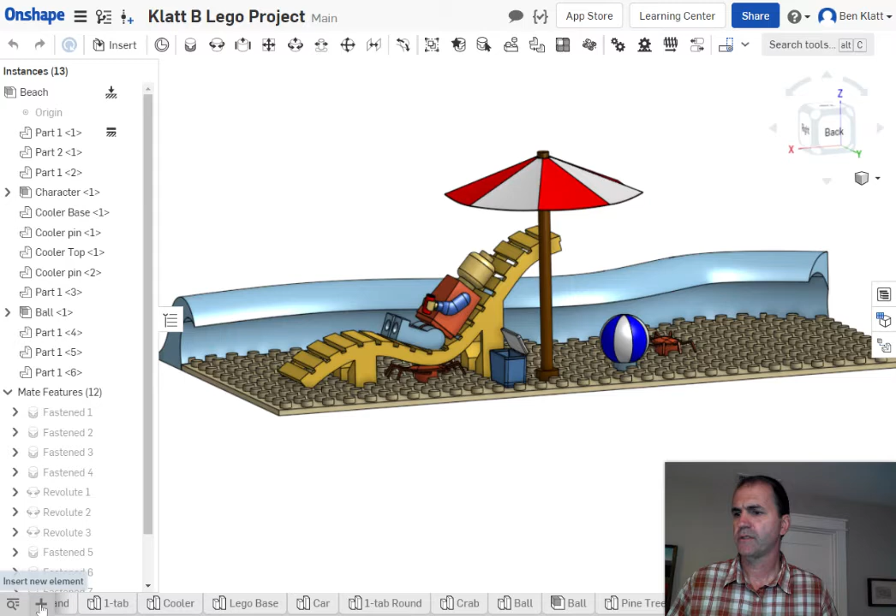But first of all, we're going to start a new drawing file, create drawing. As always, we're going to do the ANSI A-inch, with no views because we're going to place that. And once that thing pops up, I'm going to find my 4-tab piece. Now, this automatically popped up for me. Sometimes it doesn't, so you have to come up here and insert a view.

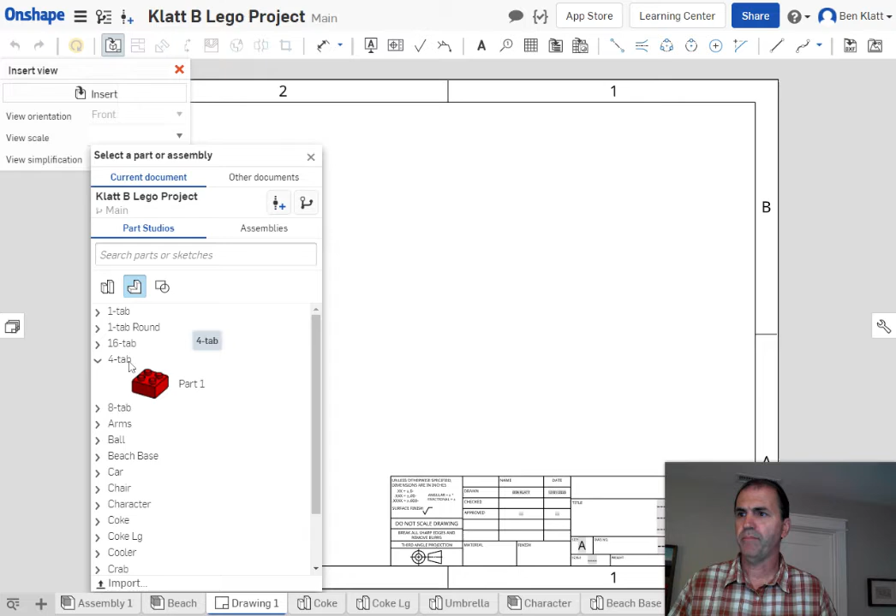And click insert, and then it's going to come up with everything that's in this document. Find your 4-tab piece. Not sure why it wasn't giving me a little preview. Usually it does that. There we go. If you click that one little guy on the left, it'll show you a preview of what you've got. We're going to do the 4-tab piece. Now it's going to probably automatically scale it for me, which I actually like. I think I might scale it down a little bit.

Now, I'm clicking on the front, and remember your gold is what you're projecting, right? So I'm projecting up to the top view. Now the right side view would be identical, so I'm not going to do a right side view. I'm just going to do those two this time. That might be a little bit crowded.

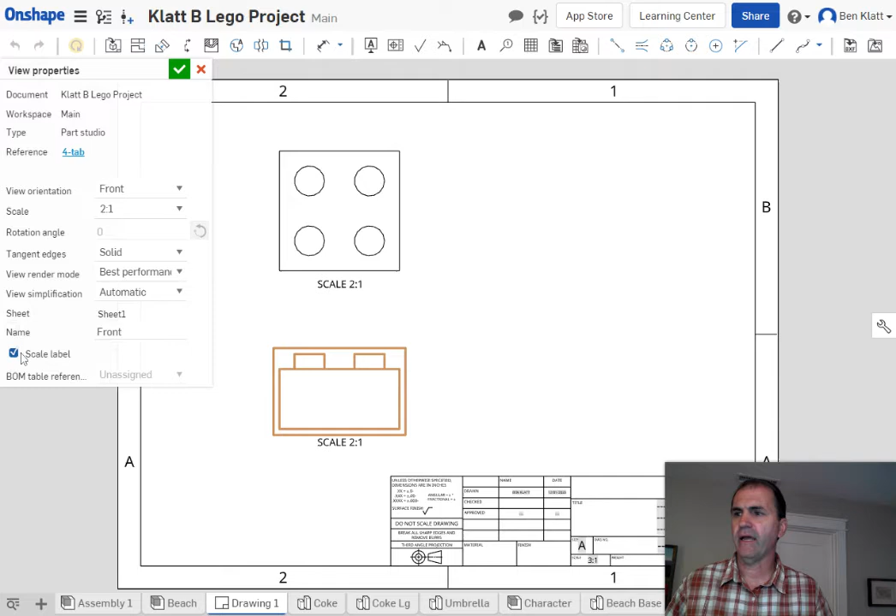So I think I'm going to change my scale, hit escape, double click on that. And right now it's 3:1. Let's make it 2:1. Yeah, I like that. I don't need to show the scale, so I'm going to turn off the scale label. So I think that will work. I'm also going to turn off the scale label on that one too. It does that when you rescale.

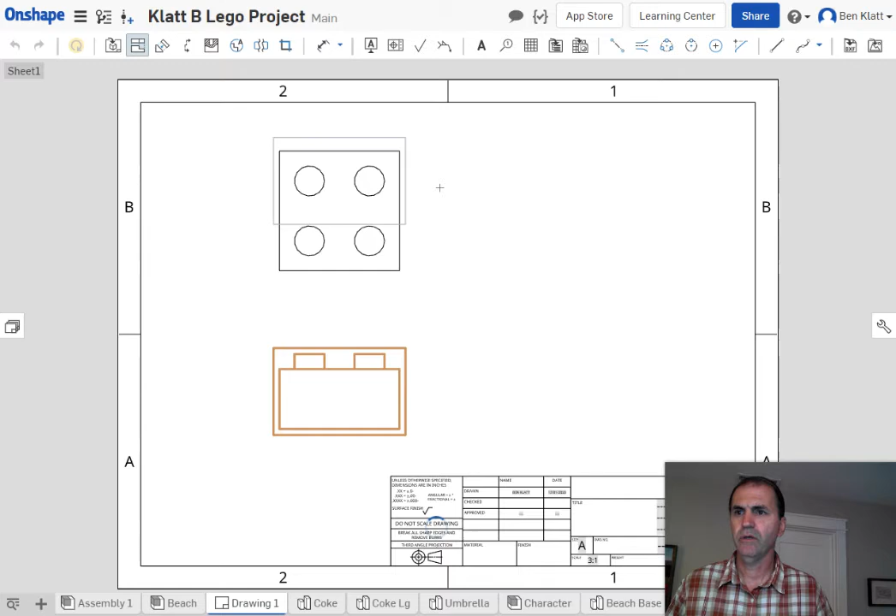Now, I need my isometric, so I'm again going to right click when it's highlighting the front view. I am going to create a projected view of my isometric up here in the right-hand corner. And as always, I like to make the isometric double, oops, somehow I just, okay, well, I don't know how I did that. I'll undo, get rid of that. Double click on my view. I think I actually accidentally projected.

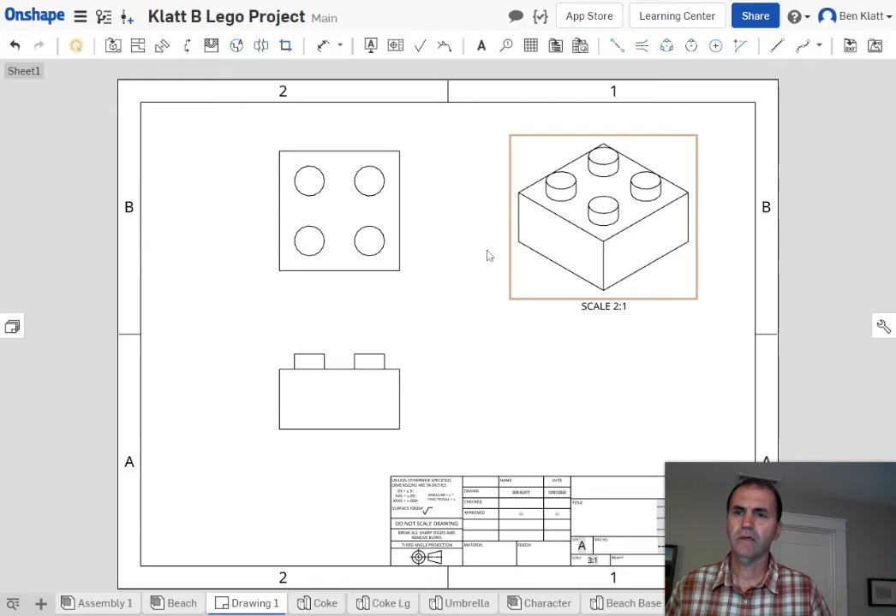I wish it wouldn't do that scale label thing. But I am going to right click. Come on, get rid of that. I don't want that label. Okay, right click on that, and I'm going to show shaded view for my ISO. Okay. So right now, remember this is shelled.

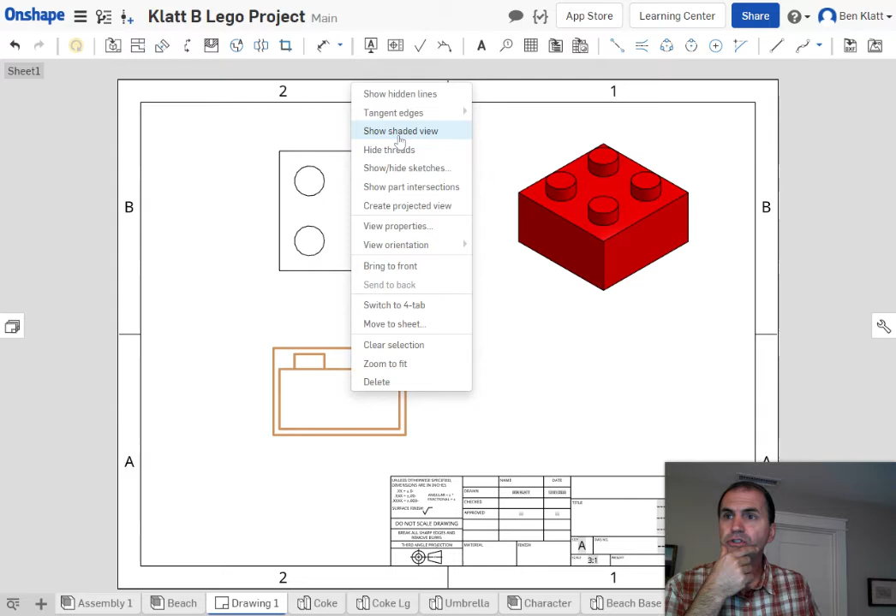Now, another thing that's going to happen is right now there are no hidden lines. So I'm going to right click on that and say I want to show, or sorry, I said shaded view, I meant hidden lines. Show hidden lines. And that did not bring that up for this one. Show hidden lines. Okay, maybe it was on, or these are hidden beneath these object lines.

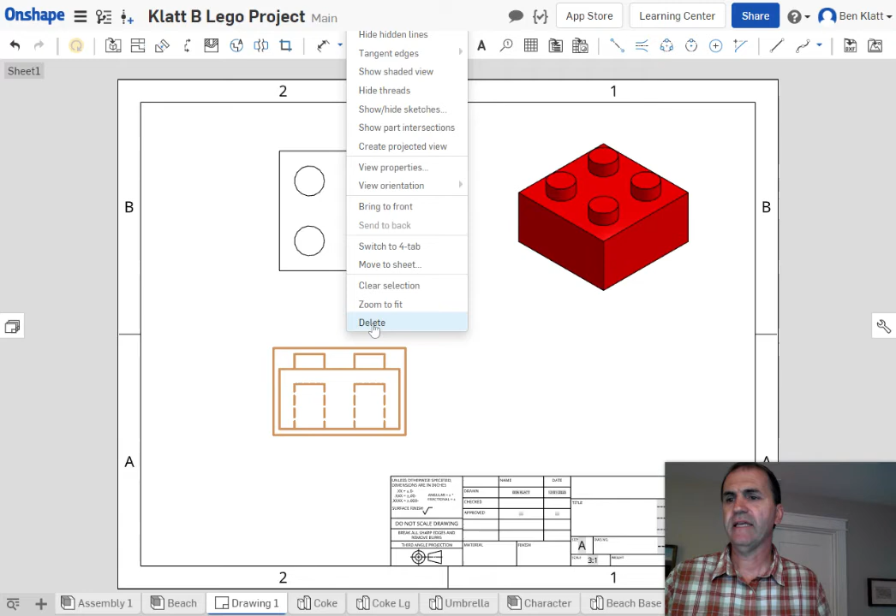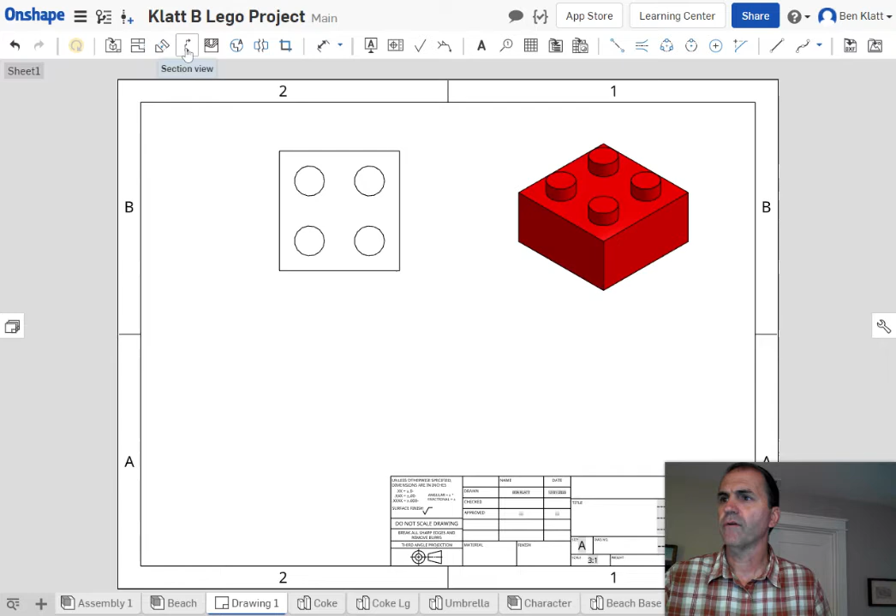All right, now, wouldn't it be nice to see inside of here? So let's make this a section view by deleting our front view. And then we're going to come up here, right click, and do I create a section view from here? Or do I have to come up here? I want a projected view, auxiliary view. See, I've forgotten this stuff too. Where is my create a section view? Oh, there it is. It just doesn't look like the normal things I've seen. So there's section view.

So we're going to click that. Now I want it to be horizontal because I want it to be the front view. And I'm going to align it to the center points of those marks rather than the middle of the part. I want to align it there, and then come to the middle. Well, maybe I'm going to have to click on that center point. There we go. And it does go through the point.

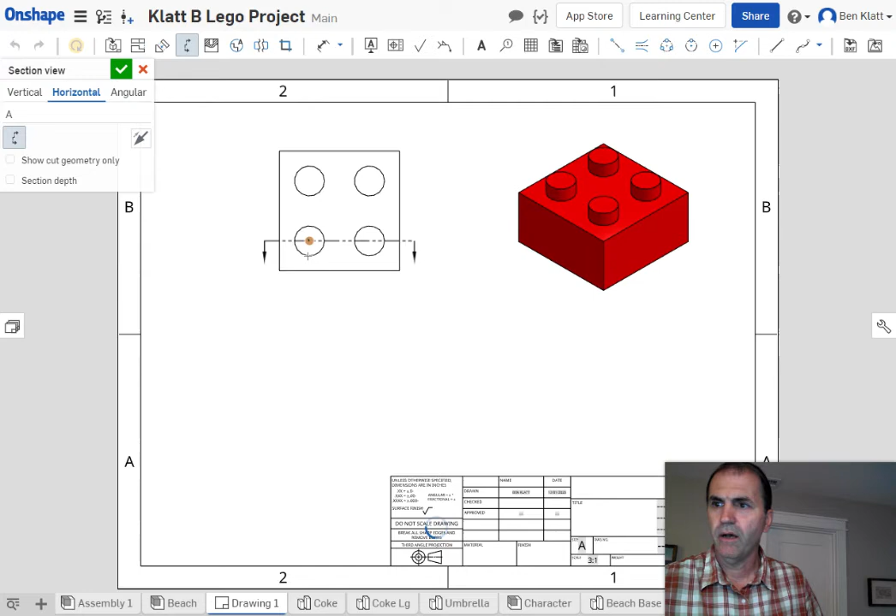Okay, it will go through the part for doing that. So let's do that again. I clicked section view, the point that, and I don't want it vertical because I'm using the front view, and I'm going to choose the middle of one of those circles. It can be the top or the bottom of that part, doesn't matter. Drag my mouse down and click again, and it will create that section view.

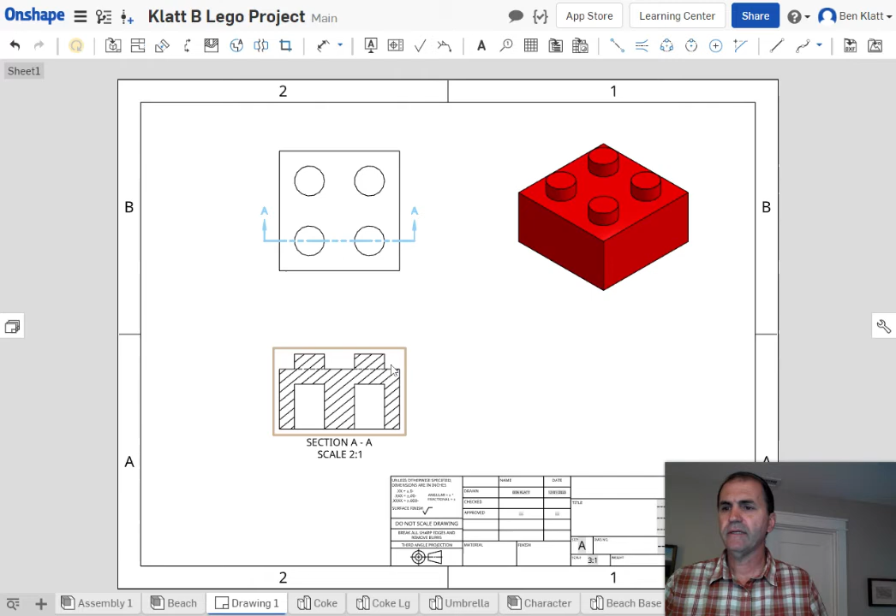All right, so now we can do some dimensioning here. So first of all, remember our sweep method, right? We're going right to left, left to right. There are several features that I want to show their location. So holes and protrusions that are cylindrical, I'm going to show that those things are lined up.

So the first thing I'm going to do before I do anything is put in my reference stuff, right? So over here, we've got center marks that I'm going to put into each one of these circles to show the center marks for those. Then I'm going to show a center line that goes through a couple of places. I'm going to go from there to there. Now it's going to stick out a little bit. That's good. Now this also shows that the hole and the cylinder are lined up together.

Go from there to there. Cool. Now we're also going to do that from here to here and show that these are all lined up as well. And I know that one is hidden beneath the section line, and that's okay. And now we're showing that all of those center marks are lined up.

All right, so I think I will start in the X direction. Usually you'll show holes and things that are aligned by their center points and where you see them as a circle, especially if it's a hole. So if I'm going in the X direction, I'm going to have the overall width, but I'm going to have 1, 2, 3 dimensions because I'm showing the location of 2 things and the overall.

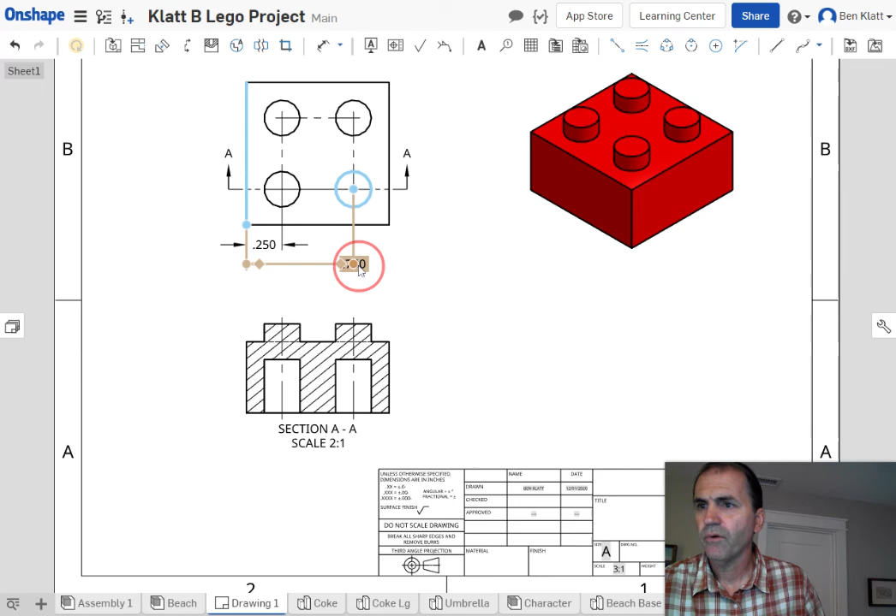And boy, I don't like where that text showed up. There we go. And finally, end to end. Where'd my dimension tool go? There it is. From there to there. All right. Good deal. So we've shown that way. Now we're going to do the exact same thing the other way.

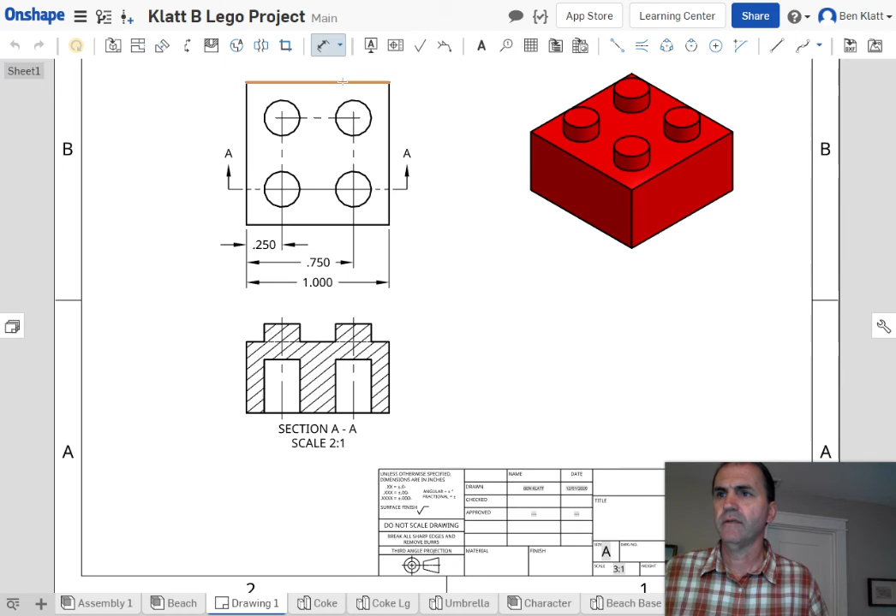I think I'll show my dimensions. Remember, we want to be in the box. So if you drew a box around there, we're going to do the same thing the other way. Boy, it's hard to get a hold of some of these things. There we go. Whoops, I don't know why I chose a line. Let's try that again. Dimension, I want to dimension from that line to that point. There we go.

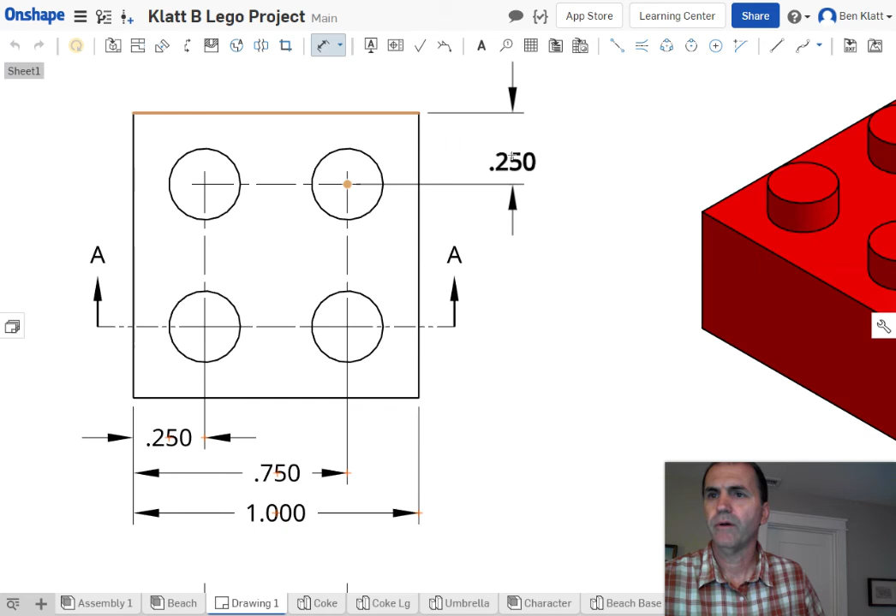Might have to move things around a little bit. That's okay. I can move that over there and that over there a little bit, give myself some more room. Now I'm going to dimension from there to the other circle. And finally, from, whoops, I'm not in the command, from there to there. Okay, I want them to be clean, easy to read, the right distance away. Okay, that looks pretty good.

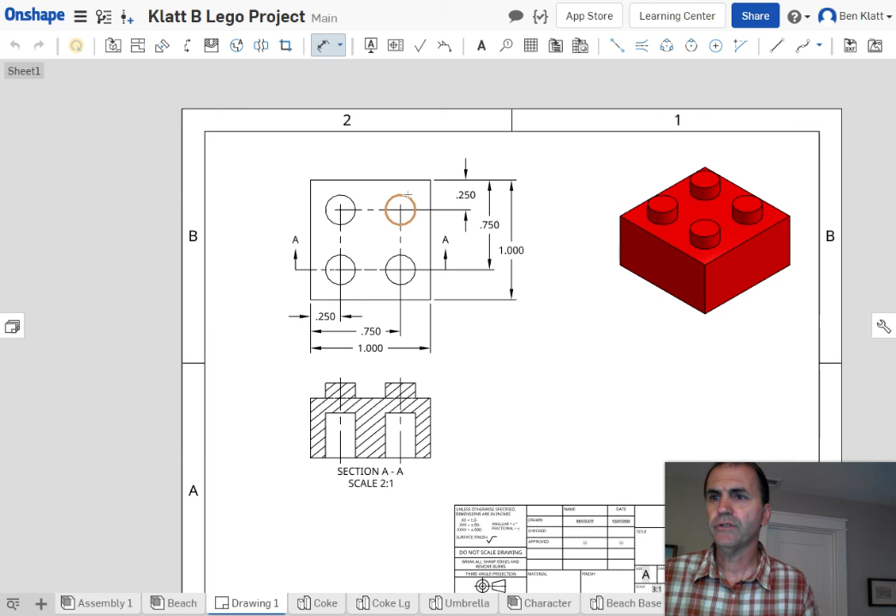Now, the one thing I am missing is what are the sizes of the holes? So this is where I'm going to have to break a rule and probably go outside the views because otherwise I'm going to cross over a bunch of lines. Okay, so this time I think I'll choose this one and come up here. Oh, now that is not a hole callout. That is showing the diameter of that, but it will also show the same diameter here because there's no hidden lines. So we assume that those two things are the same.

All right. So there's my X and Y directions. That's my depth and my width. Now I need to do the height. So we're going to do from the bottom of this guy to the hole for 1, and the height of the main part of the block for 2. Notice I'm moving my text around to be close to the middle, and finally from there to the entire top.

All right. So I needed features in the X direction, got them. Features in the Y direction, got them. And my overall heights, got them. Okay. Now this one's fully dimensioned. We're going to talk about how to do some things that have weird shapes and spline curves and things that are really hard to dimension next.